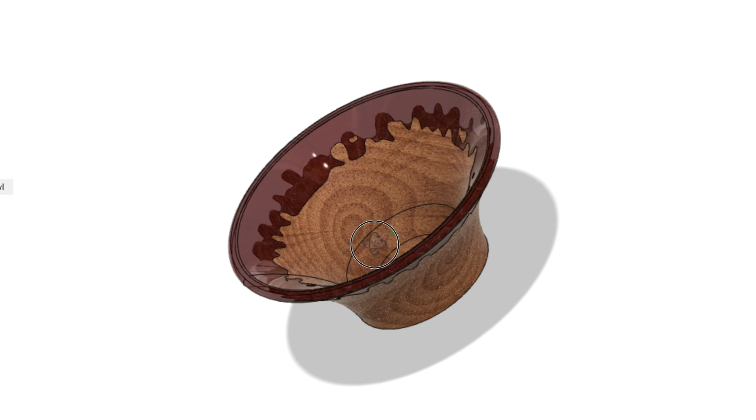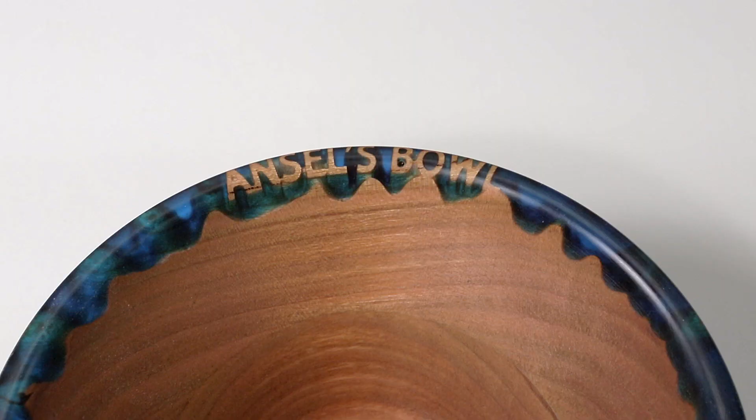What's up, CNC woodworkers? My name's Corbin Dunn, and this is a small series on how to create this epoxy drip bowl with a CNC machine.

In the last two episodes, I showed how to design the bowl in Fusion 360, some computer-aided design for the basic shape, and then an episode on how to actually do the mold with the bumpy pattern to pour epoxy into and use as a blank for machining out the actual bowl shape. In this episode, I'm going to discuss the toolpaths or the CAM, the computer-aided manufacturing. So how to actually go ahead and create the toolpaths to make this shape and the mold shape. So let's jump into it.

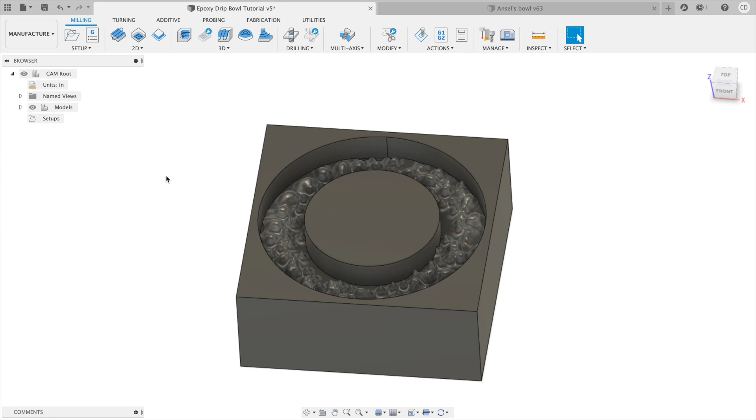So the first thing I do is switch from the design phase to the manufacturing phase inside Fusion 360. From there, the first thing you always have to do is create a setup. So I hit Setup, New Setup, and here we're going to do the setup for the mold first. The important things that we want to take a look at are going to be the stock.

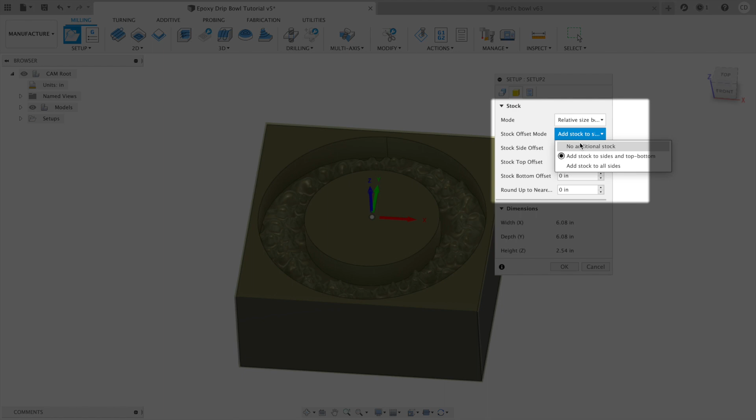So I select the stock, and I go down, and for the mode, we want a relative size box with no additional stock. This is because we're going to create a rough size piece of this specific size out of wood and start that as our base. I then select the stock origin as the top left portion because that's just my standard of what I like to do. I then rename the setup because we want good organization and practice.

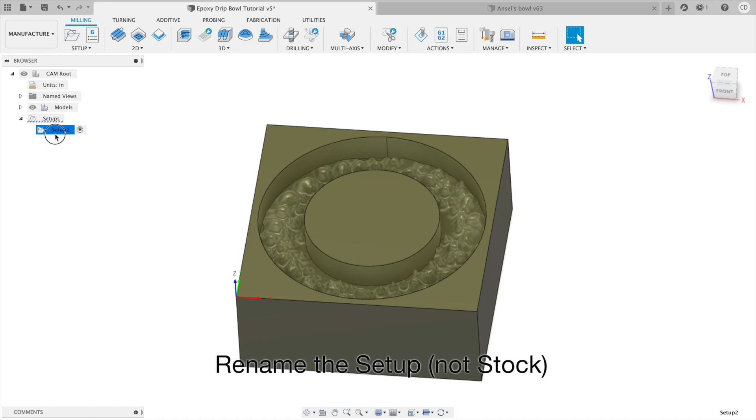The first thing we're going to do is create a pocket clearing. Pocket clearing works from the top downwards. 3D Adaptive is much faster, but pocket clearing works better for stuff like this to avoid chip out in the wood. I'm going to select a 3/8 of an inch spiral upcutting bit to remove most of the waste. Check out the description to see the exact bit that I'm using and more details on it.

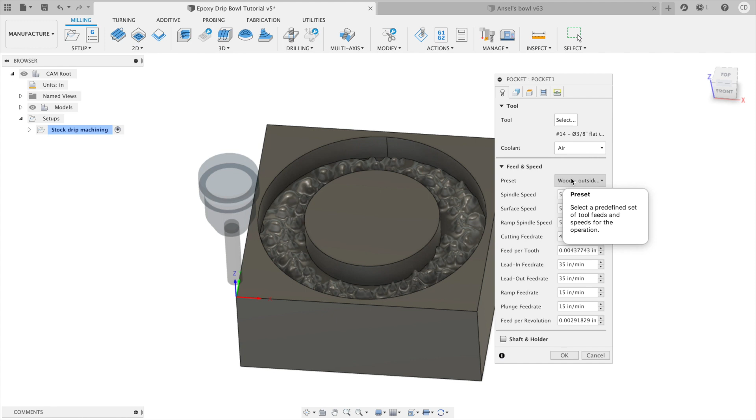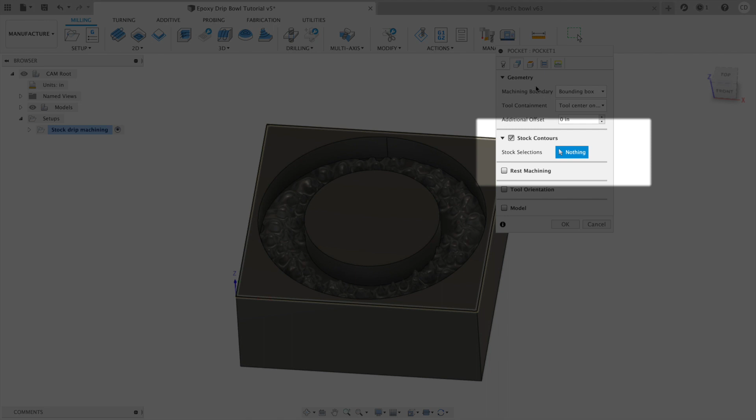One of the first things I like to select is the shaft and holder with a fail on collision. This way in software it'll tell me if the bit or the holding portion of the bit is going to actually hit something and stop and alert me that there's going to be a problem. Next, I generally like to select a stock contour. This just helps limit where we're going to be machining.

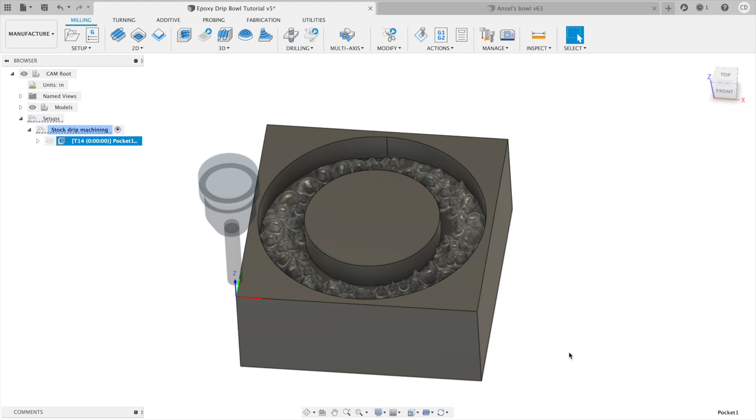Finally, I like to go ahead and set stock to leave to be about 0.010 of an inch. This gets us a little bit finer of a detail that we can clean up with a finishing bit. The maximum roughing step down is 0.03 of an inch, which is the default. So I take a look at the toolpath that this generated, and it looks like it's not going to do a lot of stuff. It's not going quite as deep as I'd like.

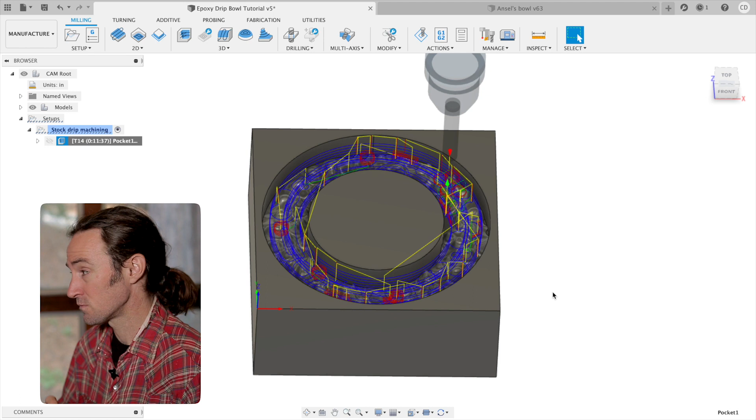So I'm going to go ahead and right click on the toolpath and select Edit. Go back over to my passes, and I want the passes to be about 100 thousandths, and then hit OK and see what this does. You could do 50 thousandths of an inch or half this to get a little bit finer and more detail, and it will create less chip out on some of the top of the mountains. So if you're getting chip out, use a smaller step down on your roughing pass. Disadvantage is it takes longer.

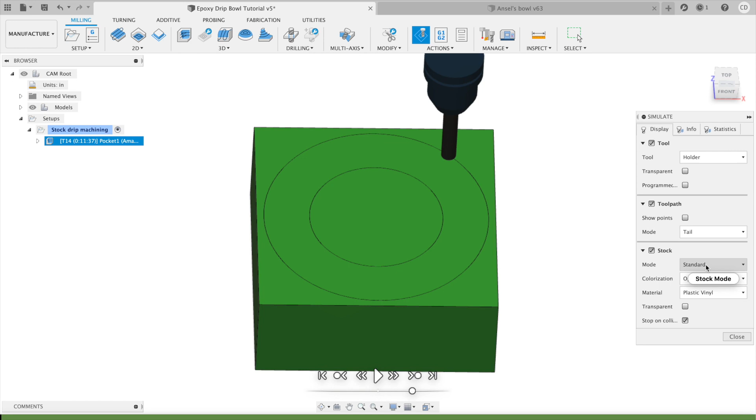From the looks of the toolpath in the preview, it seems okay. I could go ahead and simulate it and take a quick look and see what the simulation is going to be like. Standard things I do on simulation, I want the toolpath to show the tail, and I want the mode to be standard, and I usually check stop on collision so I'm alerted to any collisions that might happen.

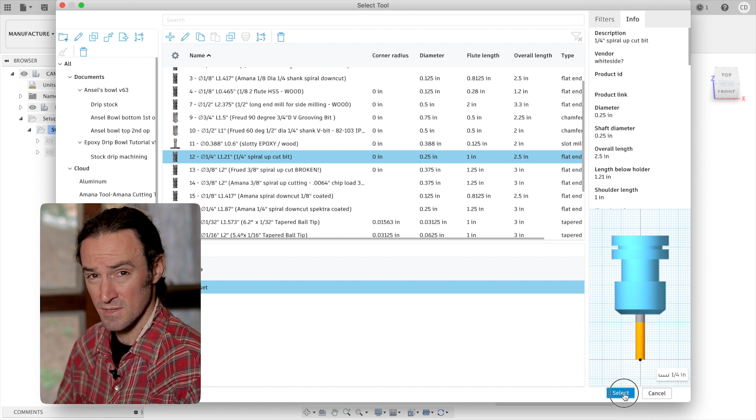After that, I go back and create a derived operation to do some more pocket clearing, and the purpose here is to just get a little bit more detail with a different bit. So I select a 1/4 inch spiral upcutting bit. I could just do all of this with a 1/4 inch spiral upcutting bit, but the 3/8 of an inch bit seems to be a little bit faster, and then I toss in my 1/4 inch bit to do a little bit more finer detail.

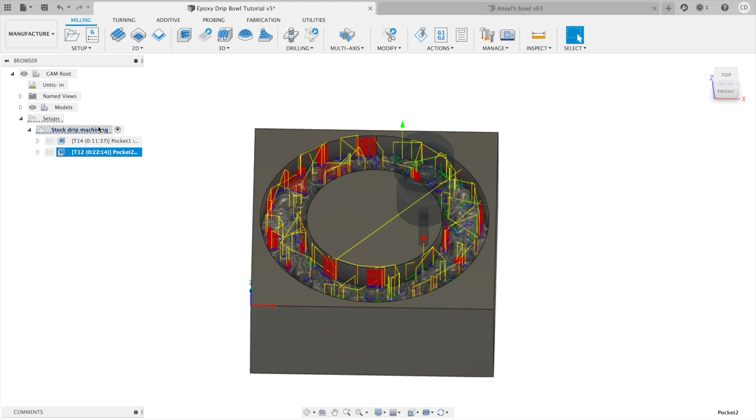The only trick that you have to do is to make sure you select rest machining, otherwise the 1/4 inch bit is going to do the exact same toolpath that the 3/8 inch did, and we don't need to do that. So from there I can see the 1/4 inch bit will get me a little bit deeper in some of the pockets and give me a little bit more detail, which will be nice. So next I need to do the finishing pass. So from the 3D machining tab, I'm going to go ahead and select a 3D contour.

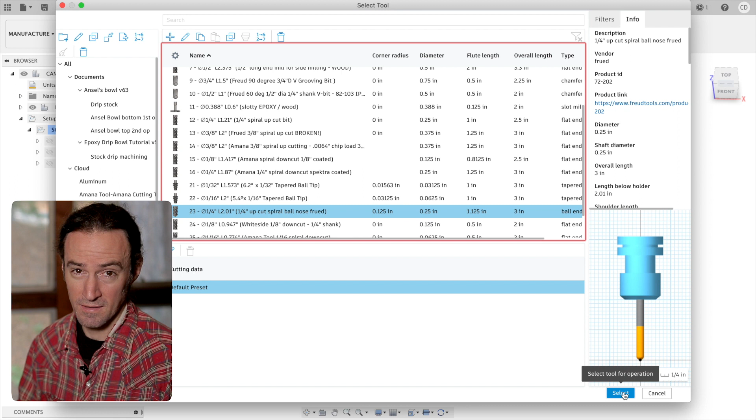For my finishing passes, I'm going to use a ball end nose, specifically a spiral upcutting 1/4 inch ball end nose. The 1/4 inch gives enough detail for this particular operation, but I could use a different bit to get more detail. So as before, I'm going to select shaft and holder, fail on collision again.

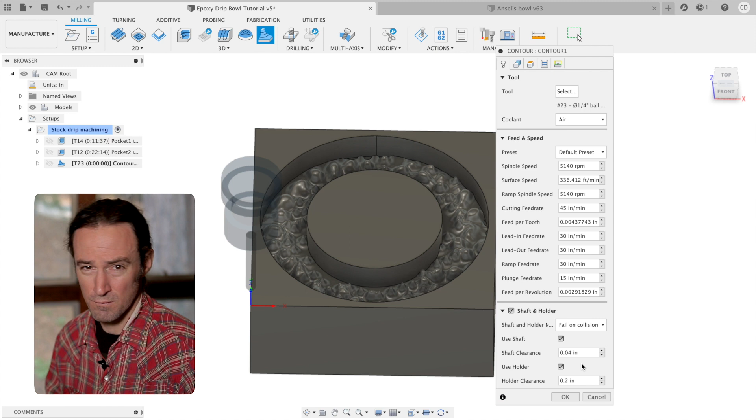Notice I'm not really talking about speeds and feeds. I'm using a Tormach PCNC 1100, which is a better machine suited for metal, and it's rather limited in RPMs for wood. So really my wood speeds and feeds are kind of just specific to my machine, and if you have questions about speeds and feeds, please comment below and I can try to help answer some questions.

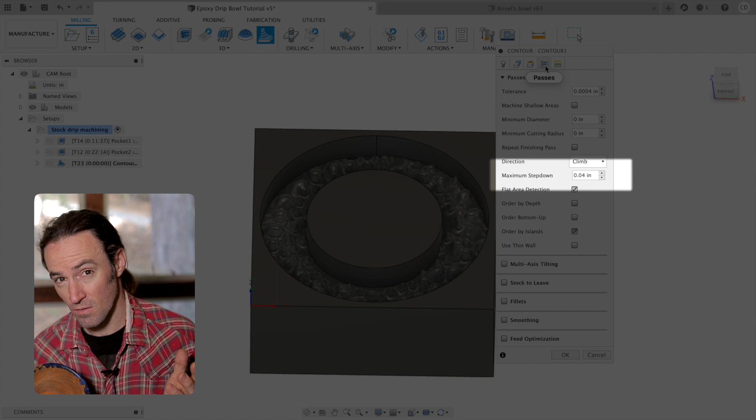So I go over to the passes tab, and the only parameter I like to change is the maximum step down. The default here is 40 thousandths of an inch, and to get a finer detail where you don't have to sand a lot, I change it to about 10 thousandths of an inch. You can do a little bit finer, like 7 thousandths, and I go finer if it's a really hard wood or if I'm doing epoxy and want a better finish, but for cherry, 10 thousandths of an inch works pretty well.

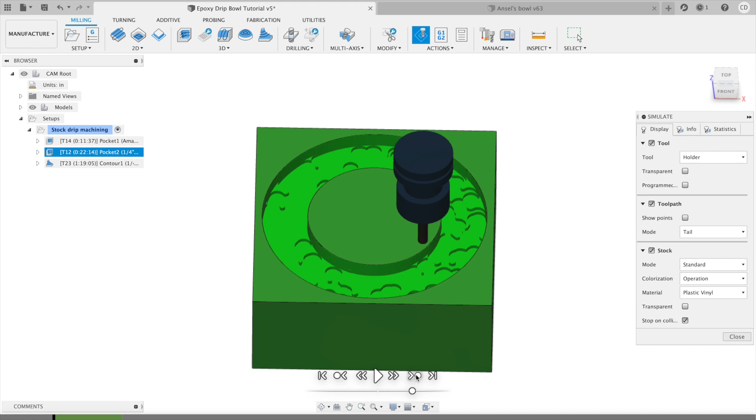So once the toolpath generation is done, I can go ahead and do some simulation and see how well this will work out. One of the things that I'm noticing is that the first operations are kind of leaving little mountaintops.

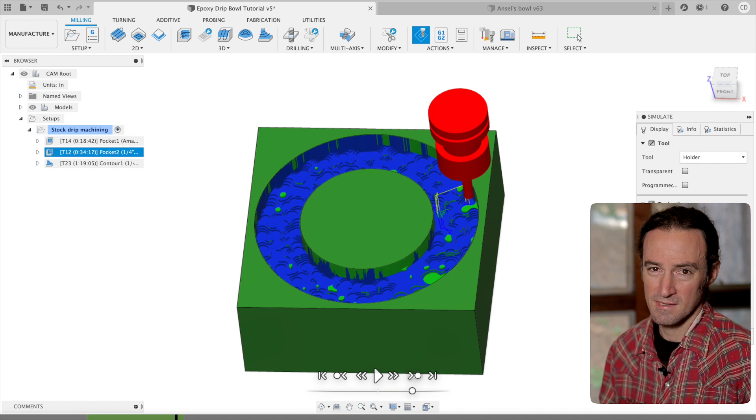Once I get to the spiral upcut ball end nose finishing phase, I'm getting some collisions. It's not really a big deal because the mountains machined in the prior roughing passes left a little bit too high of an area, so it's going to just collide with it a little bit. But for wood, it's not a big deal, and the depth of what it's doing doesn't seem to be causing issues. If I wanted to eliminate this, I could do a finer step down in that first roughing pass and not have this issue.

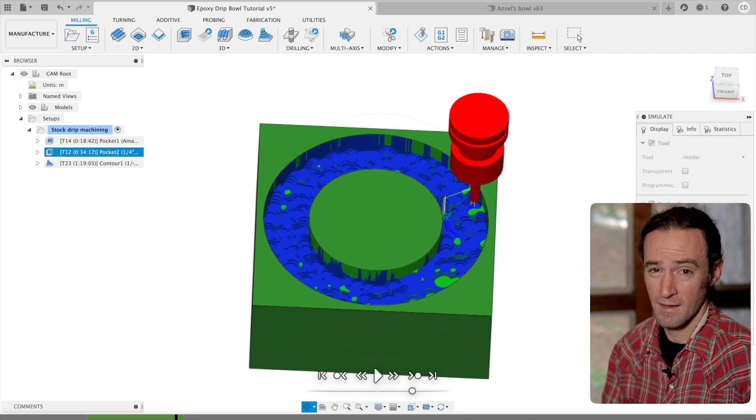So I do a little bit more simulation and just make sure everything looks okay, making sure any of these collisions that I'm seeing here aren't going to really be a big deal.

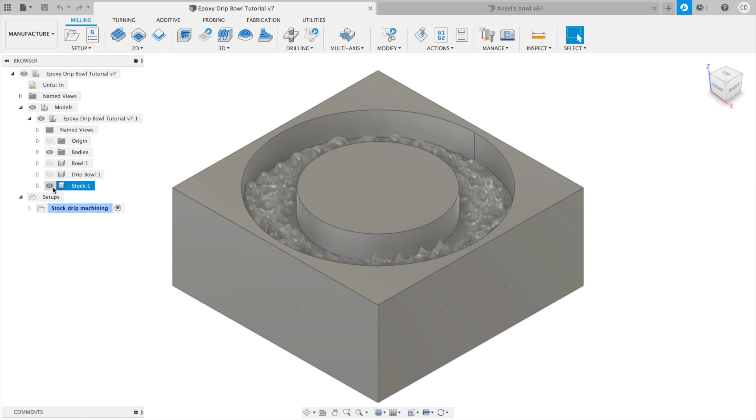Alright, so now into the bowl cam. So now we want to go ahead and hide the stock and then go ahead and expose the bowl body, or actually the bowl component, and create a new setup.

The interesting thing here is we want to make sure the body for the bowl is selected. So I go over and expand the outline view for the bowl and make sure the body is currently selected.

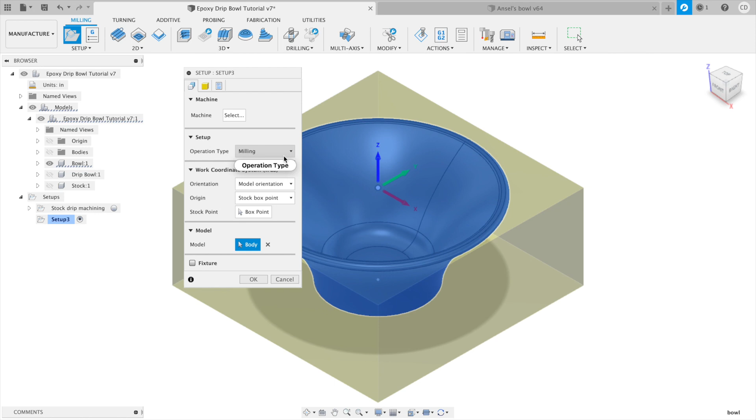Next thing, I want to set up the stock for this item, and I'm going to go over to the stock tab. I'm going to drop down the list and select from solid, expand the stock item, and then I'm going to select the square stock body, which is the basic size of what we're starting the machining with.

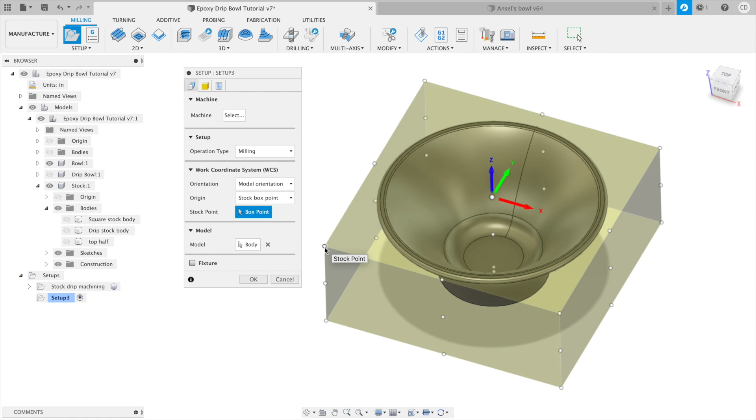Next, I need to set the origin, and for now I'm going to set it to be the top left, but we're going to change this in just a second, and I'll explain why in a brief moment.

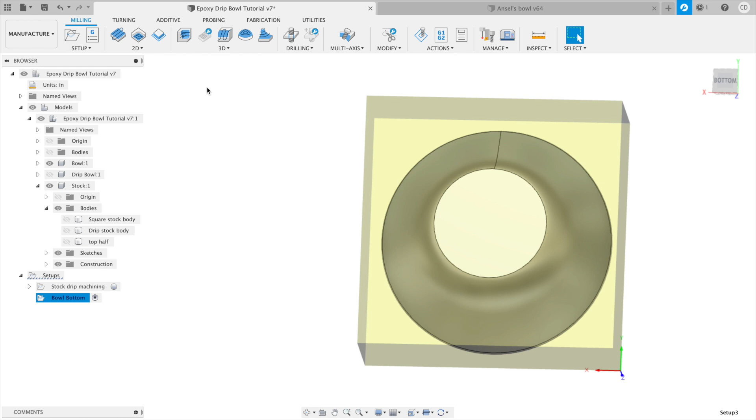So I want to do the bottom of the bowl first, so I'm going to name this operation bowl bottom, and I want to go ahead and flip the bowl around to the back side of it, and I generally want to keep the orientation of stuff consistent. So I find it easiest to create a new named view and then name this the bottom cam view so I can go back to it really easily.

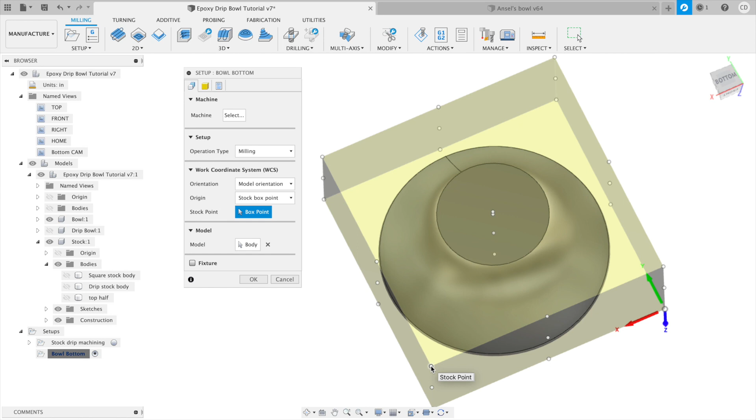Once I've done that, I can go ahead and re-edit that bowl bottom setup. I right click on it and select edit. Now I want to change the stock point to be this other origin. When I just select it, the axis orientation is obviously not correct, so I want to select the z-axis and x-axis.

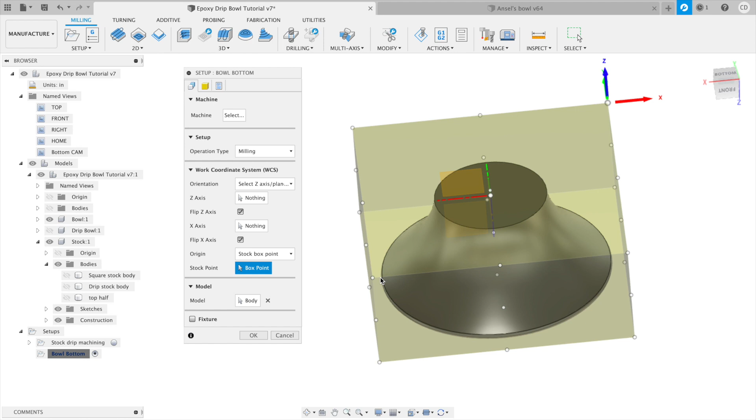So I go ahead and flip these around until I get that top left point to be the origin for my machining operations, and this is just my preference. I like this top left point because it's really easy to indicate in. So everything looks right, and that's our orientation for doing this machining.

Okay, so now it's time to do some of the tool paths. In general, I'm going to do a roughing operation with a 3/8 of an inch end mill, and then the final operation with a 1/4 inch ball nose mill.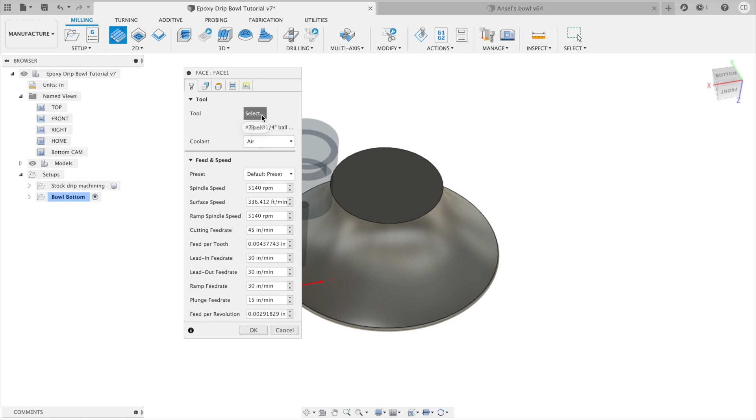So the first thing I do is create a 2D face, and the reason why I'm going to do the facing is I want the bottom to be perfectly flat. I can just use the 3/8 of an inch bit that I'm going to be doing my roughing operation with, and go ahead and do a facing operation with that bit. What this will do is create the bowl bottom to be perfectly flat.

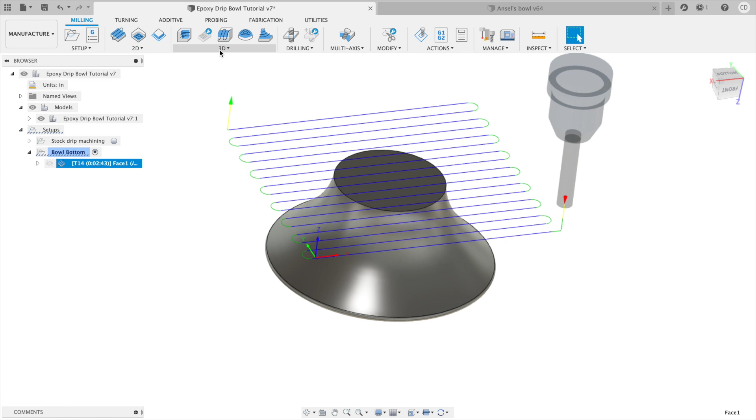So the next thing I want to do is create a roughing operation for the outside of the bowl shape. I'm going to go ahead and do a 3D adaptive clearing for this roughing operation. I'm going to select my 3/8 of an inch end mill, a spiral upcut end mill, and this will be good to remove a lot of the waste really quickly.

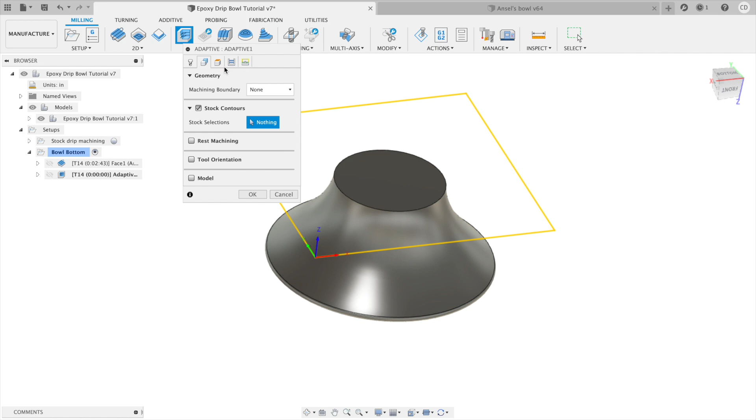Again, like before, I'm going to select the shaft and holder and make sure fail on collision is selected, so in software it can detect if it's going to actually hit anything. I'm going to set the stock contours, and I'm not going to do anything special for the heights or the passes. The roughing step down is 300 thousandths and the fine step down is 30 thousandths. Those are the important things to look at. Also note, I have stock to leave set to the defaults of 20 thousandths.

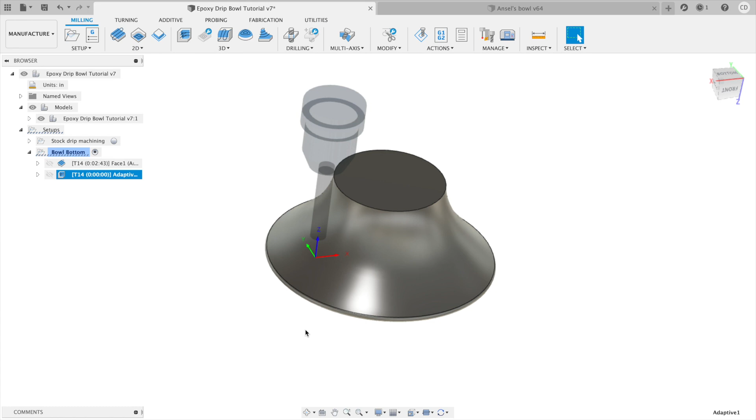So the next thing I want to do is create a 2D contour around the whole stock. And the reason I want to do this is because we want to create a perfect square shape or rectangle around our stock piece. We're going to start out with something we cut on the table saw, which may not be a perfect square. If we machine out the outside to be a perfect square, then we can use that to indicate in on the second operation and know exactly where everything's going to be.

So the way I do this is I'm going to go ahead and create a 2D contour around the base for the stock size. I'm going to take that and inset it just slightly, and the amount that I inset it is going to be our origin offset for the second operation that we're going to do.

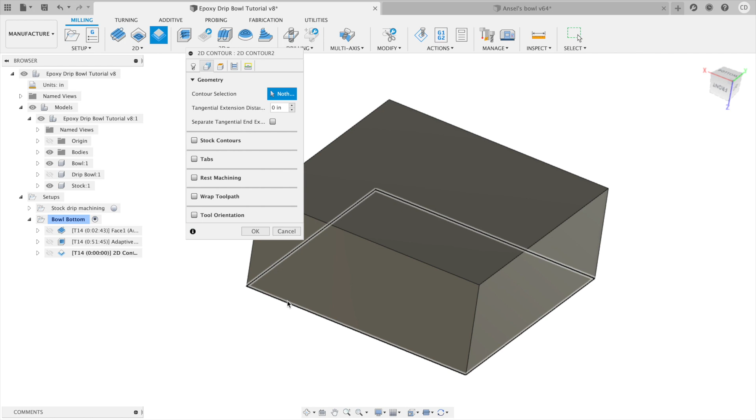So I go ahead and select 2D contour. I'm going to use that same 3/8 of an inch bit. I'm going to show that stock again, and then I'm going to go ahead and select that stock contour as the thing we're going to machine. It's going to machine the selected contour's bottom height, so that's important to note.

And here's the special part. The stock to leave for radial, I want to be basically negative 50 thousandths of an inch, axial 0. And so that's going to do a slight inset cut on the whole stock profile.

So next I want to do the final operation, which is going to be a 3D contour. I'm going to select my 1/4 inch spiral upcut bit with a ball nose, and I'm going to use that ball nose bit to do the final outside passes. As usual, I select fail on collision for the shaft and holder.

Then the main thing that we have to note are the heights. The heights are just going to be the whole model, and the maximum step down is the one thing we want to change. So I go from 40 thousandths to about 8 thousandths. And if you recall earlier, you did about 10 thousandths on the previous machining stuff. So here I'm going to go a little finer and do 8 thousandths because we have epoxy.

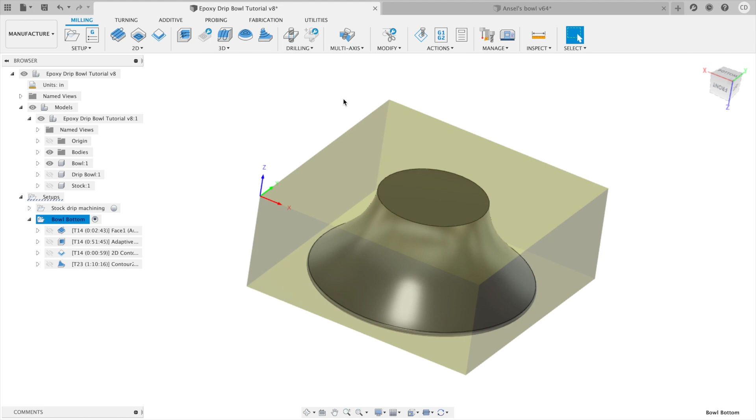Once all the toolpaths are generated, I like to make sure it's going to work. So I'm going to go ahead and select that main setup and do a simulation. As usual, I go to standard for the mode so we can do some collision detection and show just the tail operations of the toolpaths. Then I'm going to just walk through and make sure we don't get any collisions.

So now it's time to do the top operation. So I go and select the home view to reorient everything. And I want to create a new setup for the top, but we're going to have to figure out where the origin is going to be. Doing that last profile cut, about 50 thousandths of an inch inside, is something we have to accommodate.

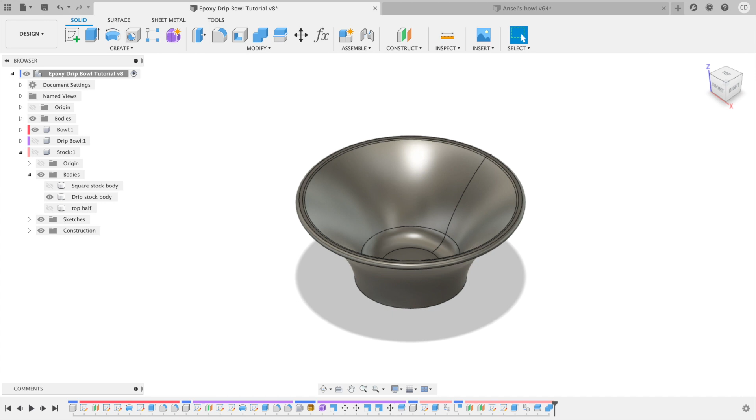So in order to accommodate that, I'm going to flip over back to the Design tab. The Design tab previously showed what we were working on before in the design mode. So I'm going to go ahead and expose the stock alone because I want to create my new origin for the top side of the stock to do the top operation of the bowl. So I hide the bowl and I show the stock. I show the square stock body. And now I'm going to right click on the square stock body and select Create Sketch to create a new sketch.

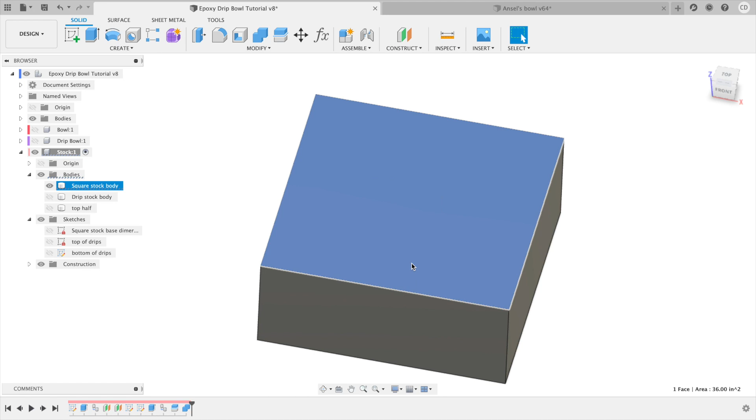From there, I want to create this new origin that's going to be inset by just a little bit. This is going to be the origin for the second machining operation of the bowl, the second op origin. I'll hit S, start typing point to select the point operation, and drop a point down in a random location here. Then hit D for dimension, and dimension to the bottom for 50 thousandths of an inch, and to the left for 50 thousandths of an inch.

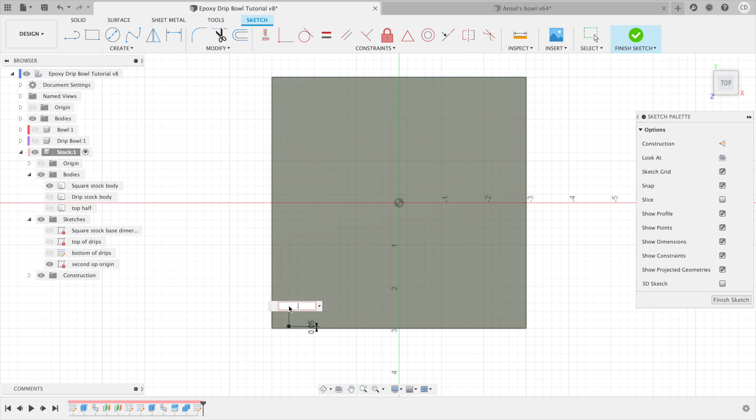This would be a great location to use parametric design, but I'm not doing that now. So what I have here is a new origin we can use, inset by 50 thousandths of an inch, which is that bottom path that we did in the first operation, the bowl.

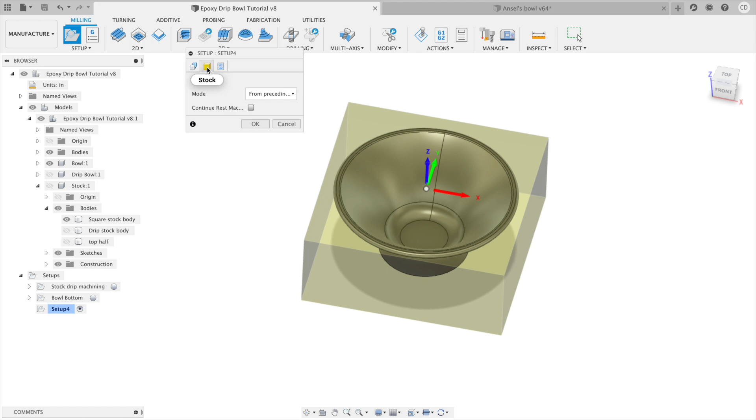Next I flip back over to the Manufacture tab, and I want to create a new setup for the bowl top. So I hit setup, new setup, and I'm going to select the same stock, square stock body that I did before, and all we're going to modify is the origin.

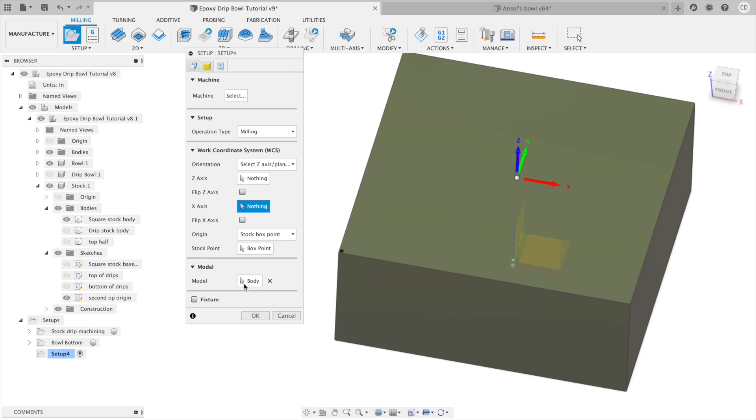So the stock is a square stock body. The stock point, now I want to select that thing on the sketch, and it's not showing up. So what we've got to do is display the stock, expand and make sure the sketches are visible. Then I can see that new origin point, and I can click on the stock point, do selected point, and then select that workspace origin.

From there, I see the X, Y, and Z axis is aligned the way that I like, so I don't have to do anything to reorient the axes, and just hit OK. As usual for good organization, I rename my setup — this is the top operation, second op.

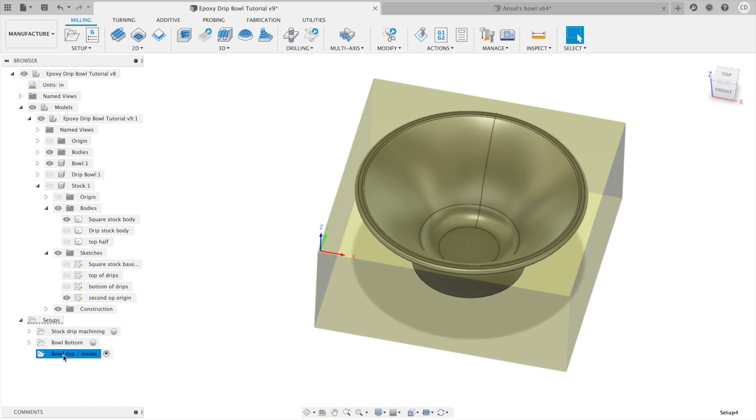So we're going to do a facing operation like we did before to get the top to be exactly where we had it. I just selected the previous one, copied it, and pasted it in to get into the next setup. I then copied and pasted the second operation with the tool to do the adaptive clearing.

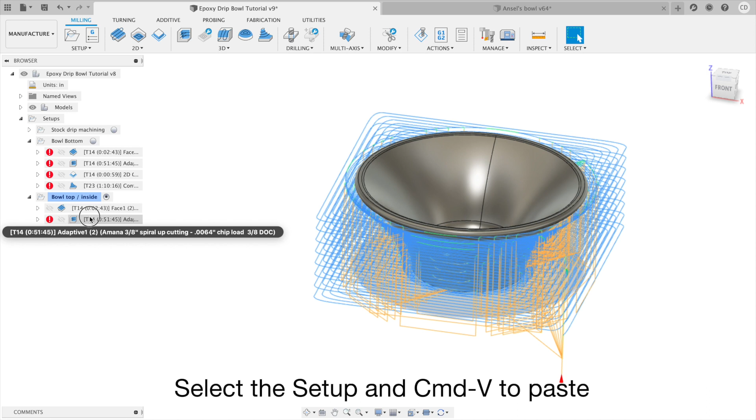One of the things we're going to see right away is that this will generate some failures. The failure message is going to be that the shaft holder is going to collide with it, because we had that shaft holder collision — it's colliding on the outside because it can't go inwards.

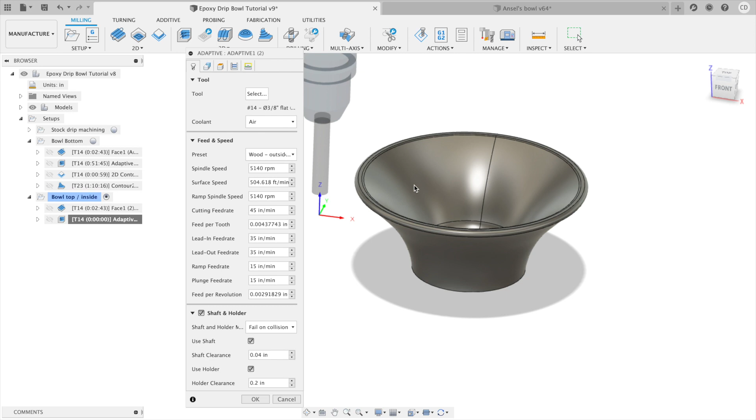So the way I'm going to deal with this, I'll right click on that operation for the roughing operation and hit edit. We're going to just make it do the roughing operation down to the bottom of the lip of the bowl, and that way it'll get that round portion of the top and then stop.

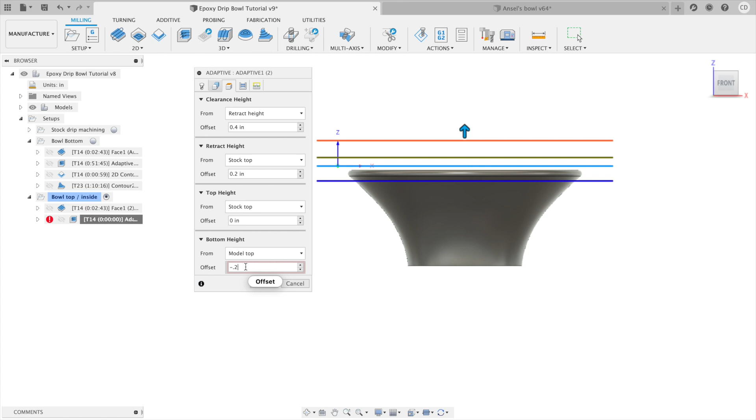So I'm going to set my bottom height to be the model top and then a bit lower, to ensure it's actually lower than the lip. I'm going to choose 250 thousandths, see if that's low enough — looks like 250 is a little too low, so we're going to go with like 200 thousandths. It probably could be just at the widest point, so it could probably be like 125 or so.

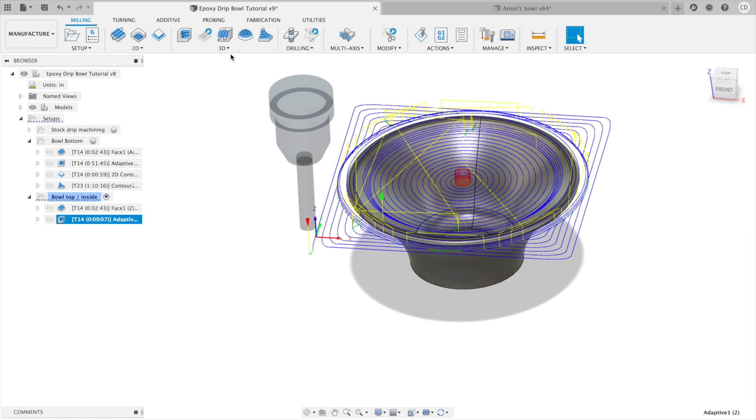So it generates the toolpath, and this time it doesn't have any collisions, which is great. Now I'm going to select that tool operation, and I want to create another one to do the rest, because this is only going to 125 thousandths.

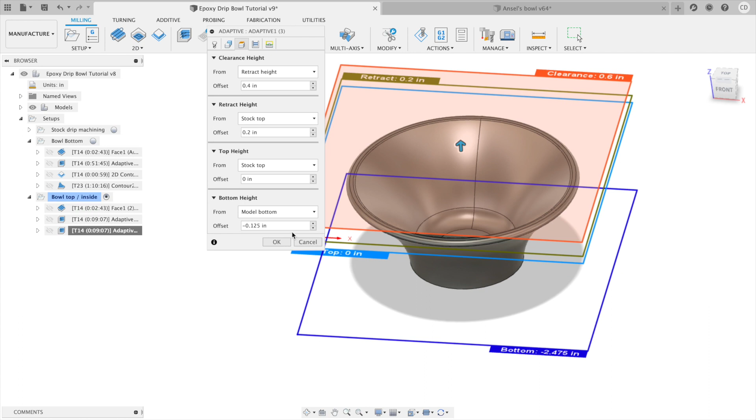So I'm going to copy and paste it and then edit it. Now we have to go back over to the Heights tab, and we're going to change the bottom to be the model bottom, so it's going to go all the way to the bottom of the inside of the bowl. But we're going to change the machining boundary to be the silhouette, so it won't do any more of the outside portion, which was done when it was upside down.

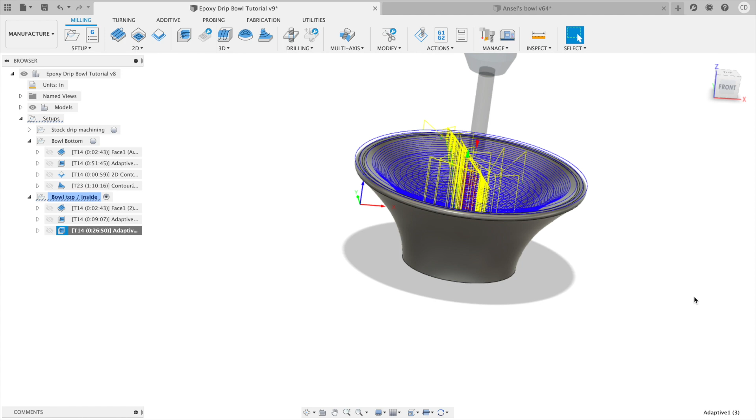So I went ahead and hit OK, and I see it generating the inside alone, and I see it generating the toolpaths here. What I'm noticing is that it's doing the top toolpath, which we already did, and it doesn't need to do that. We could turn on rest machining, or we could just turn the top height to be the model top minus 125 thousandths, which is the bottom of where that last operation did. So it's just going to complete what the last operation started.

One other thing I like to turn on is the minimum retraction policy, just to save a little bit of time.

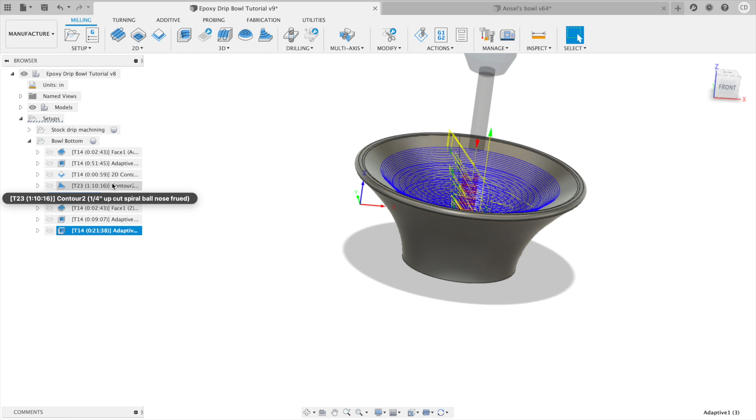So at this point I want to do my finishing pass with the ball end nose. So I just select my ball end nose path from the previous operation, hit copy, and then I'm going to paste it over into the new setup, and then we're going to tweak it a bit. I would expect, just like previous times, we would get a collision, but we might not be based on the operations that we have set. In fact, it actually looks like it's doing pretty good.

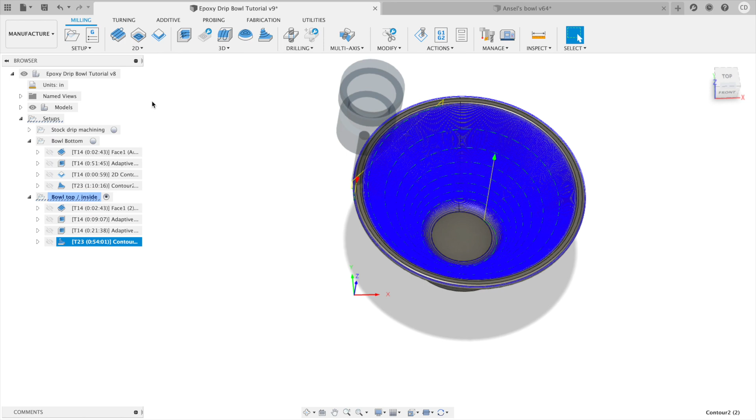But one of the things I can see right away is that it's not getting the bottom of the bowl, and so we need to figure out how to get that portion. So I'm going to go up to the top, hit 3D, and I'm going to do a 3D spiral for the bottom of the bowl to get that portion done. As usual, I'm going to turn on fail on collision for shaft and holder. I didn't have to do this for the others because I copy and pasted it where it was already set.

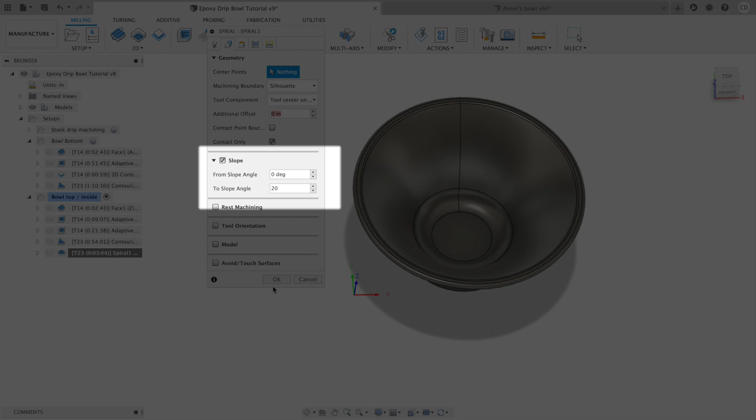The geometry, well, I'm just going to let it do the whole silhouette area as the machining boundary. And we're just going to set some slopes to limit the angles as to how high it will actually do this portion. And we basically want to machine just the flat portions here. So on that slope, I'm going to set the from slope to be 0, the complete flat portion, and the to slope, I don't want it to be vertical 90 degrees. I want to go to about 20 degrees and see how that ends up looking.

So when I look at the toolpath, I can instantly see it's not going to be fine enough. It's going to leave a rough finish. So we need to decrease the step over. So I'm going to right click on it, edit it, and go over to the passes tab and set the step over. For this particular operation, I'm going to do about 10 thousandths of an inch, which is just based on my experience.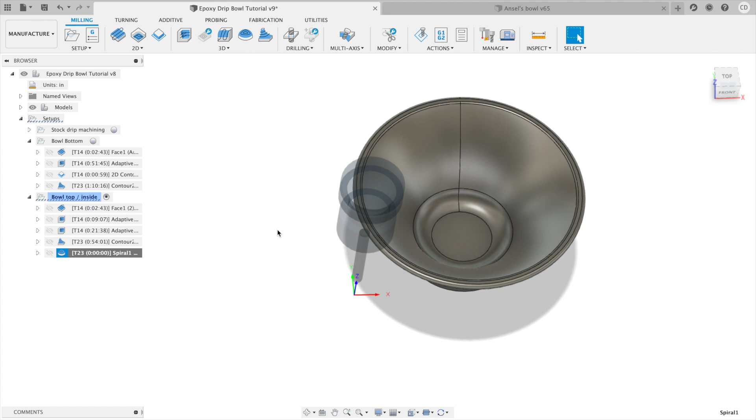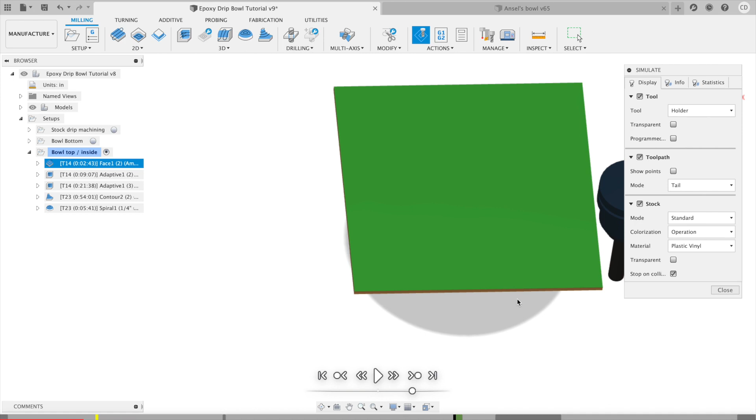So once all the toolpaths are set up, I need to simulate both of them at the same time. And there's an easy way to do this in Fusion 360. All you have to do is you select those two setups, and if the two setups are selected, you can then go ahead and hit the simulate button, and it'll simulate both those setups back to back, which is great, because if we didn't do this, we'd probably get collisions. So I'm going to fast forward through the simulation of the first one, and all it's going to do is leave us with the base stock of what we would have for the second operation.

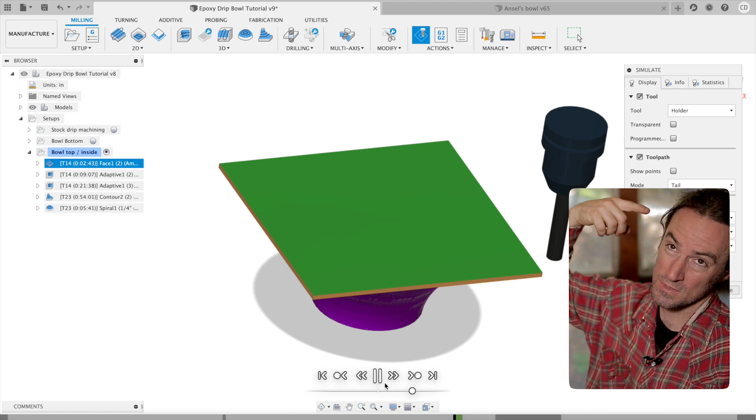And here, this is a perfect example of why I leave some bottom portion on the top of the bowl, or the bottom from the first operation, depending on how you looked at it. It's because we need something that we can indicate in. And so the start of the second operation is just going to be basically killing off the top portion, that little extra bit. So as we can see in the simulation, the top facing operation is going to probably generate it where there's like a little sliver of wood left over, especially if things aren't lined up perfectly.

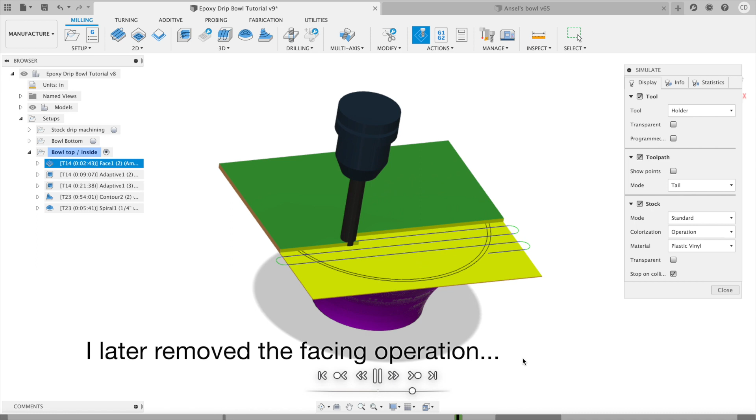That's probably not a big deal. It might snap off a little bit, and it shouldn't cause an issue with this type of bowl. There are ways I mitigate it by doing other 3D adaptives just to get it to machine it away without doing a facing op. And in this case, I'm just going to leave it as is because I don't think it's going to be a big deal.

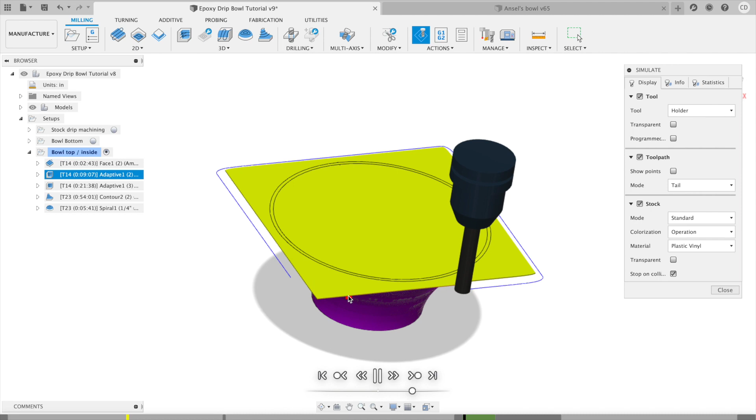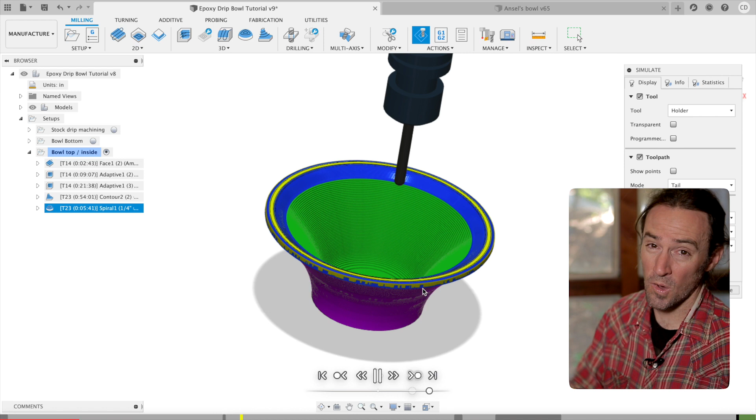The other things to note, I just watch the whole simulation, make sure I don't get any collisions, and make sure it looks like it's machining it the way I want, not doing anything funny, and I will sometimes zoom in to make sure the finish is kind of what I'm looking for. But that's pretty much it. This is what I'm going to do from inside Fusion 360 for my toolpaths. I'll export them to my specific machine as NC files for my Tormach PCNC. The export's really specific to whatever machine you're using, so I'm not going to show how to do that.

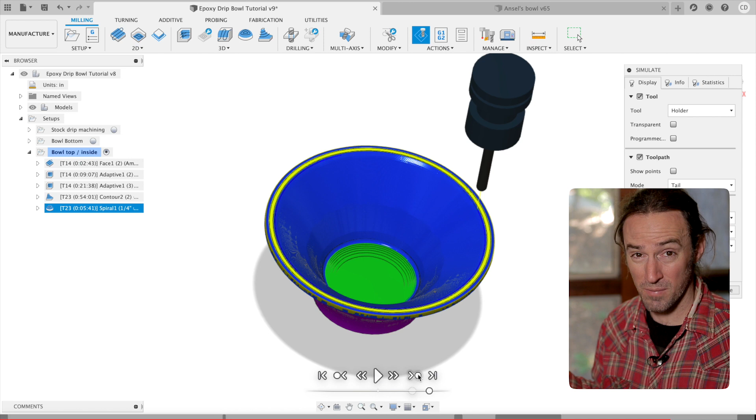But if you have any questions on how to do it, just feel free to ask me, and I will happily help you. Stay tuned for the next episode where I'm going to cover the actual creation of this bowl in real life by cutting some wood, pouring epoxy, and machining it out.